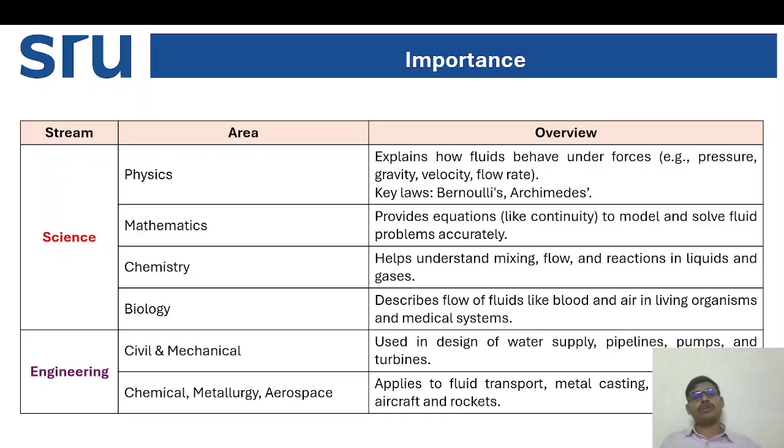Now understanding these things is very essential before going into the topic of civil engineering, particularly the civil engineering domain of fluid mechanics and hydraulics. So as I mentioned, first we have to understand the importance of why we are studying this subject, because we think this subject is only applicable for civil. No, it is applicable for mechanical, chemical, metallurgy, aerospace, physics, mathematics, chemistry and biology. In a broad view, I can tell you science and engineering. So that thing we have to understand in a precise way.

One, water distribution. To distribute water from one place to another, maybe the source is from a pond or lake or a reservoir, we should understand. Only then can we distribute fluids, and hydraulics, and coming to flood control. Let's see one after one how we are interlinked. Now coming to the three categories I have considered - it may be more, but to easily understand I have considered these things.

Now coming to air. Air is a fluid, obviously, so everyone will agree air is a fluid. As I mentioned, fluid is in vapor. Civil engineers design buildings, right? Agreed, civil engineers will design buildings, bridges and towers, so they are tall structures.

Now these structures face wind pressure. Obviously, if you are increasing to 10 floors, 20 floors, 30 floors building, wind pressure won't be similar when you are on the ground and when you are going into the higher floors. So knowing fluid mechanics helps them make sure the structure stays safe and stable in wind. Understanding fluid mechanics always makes the structure stable as well as safe in wind terms.

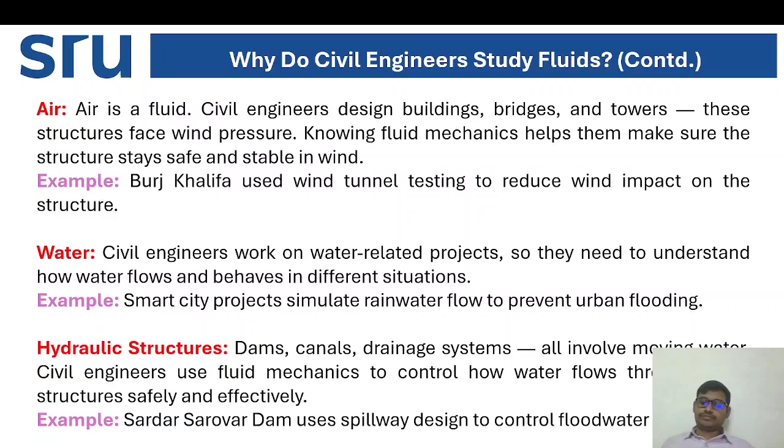Now we understood the importance, and we understood the forms like air, water, and hydraulic structures. Now the next one is the development of fluid mechanics. We need to understand how it got developed - first we have to know the past history, what happened in the past, what changes were made, what the present scenario is, and what we can do for the future. If you understand these things, tackling problems with respect to fluid mechanics becomes very easy. So first, I want to discuss fluid mechanics.

Fluid mechanics is a science that studies how liquids and gases behave, both when they are still at rest and when they are moving in motion. As I mentioned, liquid means water, solid means snow, and gaseous means vapor. So studying liquids and gases in terms of at rest - what do you mean by rest? What do you mean by motion?

At rest means, you can see a water tank which is able to supply an entire house. We place that water tank on the roof of the building, so it is constant, having some amount of water in a stationary way, but always filling and taking - we are filling the water tank and utilizing it for our needs. So when it is at rest, what are the consequences? We have to understand. And when it is moving, like from one reservoir to a certain city, if we are supplying water, what are the consequences - in the sense of making losses, less losses, and low cost. We have to focus on this.

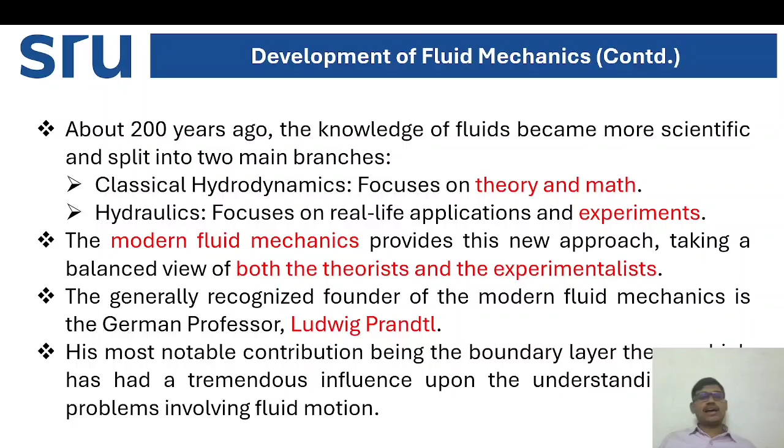Now I want to put this simply. I have summarized the development of fluid mechanics: first fluid, then Archimedes around 250 BC, then the Roman Empire, then Leonardo da Vinci, then 200 years ago they were classified into classical hydrodynamics and hydraulics, then the German professor Ludwig Prandtl.

Now coming to the development of fluid mechanics. You can see here: 250 BC, Archimedes' principle established. 1500s, Leonardo da Vinci's early fluid flow designs. 200 years ago, division into classical hydrodynamics and hydraulics. And in the modern era, Ludwig Prandtl's boundary layer theory.

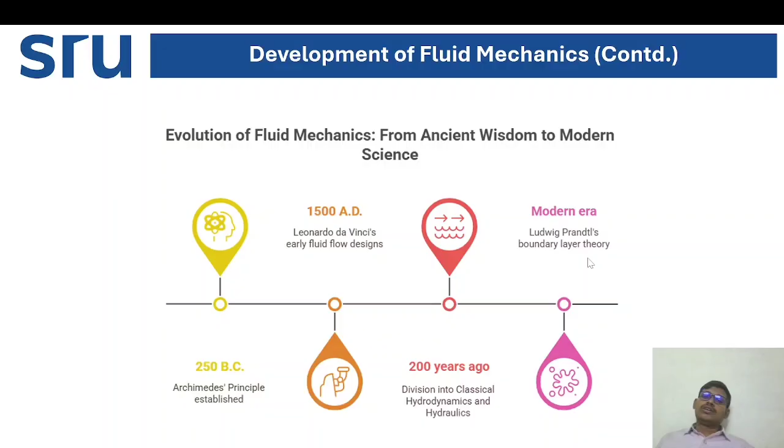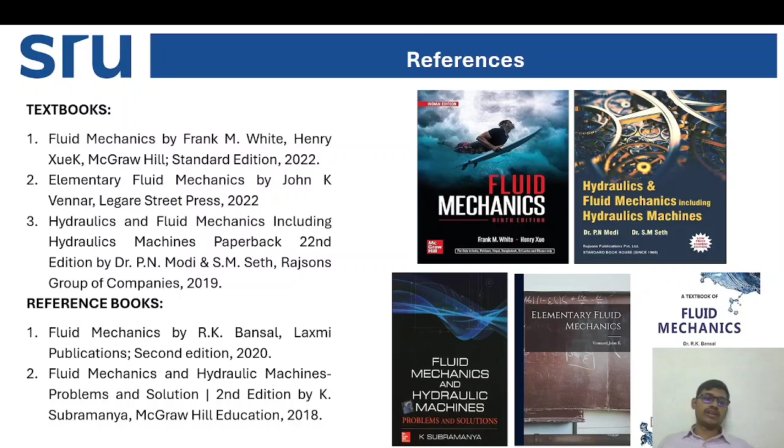I want to give some reference books which are not restricted, but they are the latest versions. If you need, you people can go through these. If not, you people can go with your own choice or one someone suggested. There won't be any kind of force - we just have to gain the knowledge.

Now coming to what is mechanics. We know fluid, right? So now what is mechanics? Mechanics is broadly classified into two ways: solid mechanics and fluid mechanics. Now we will see the definition of mechanics. Mechanics is a branch of physics that deals with the motion and forces on bodies - with respect to motion as well as with respect to forces on the bodies.

Slowly we will go one more step, that is called static and dynamic. Both solid mechanics and fluid mechanics have static and dynamic, and fluid mechanics is further divided into kinematics and dynamics. Solid mechanics is nothing but a branch of mechanics that deals with the behavior of solid materials under force.

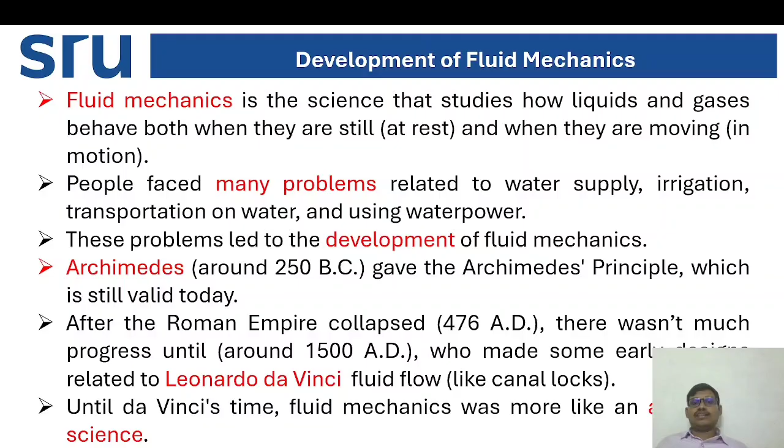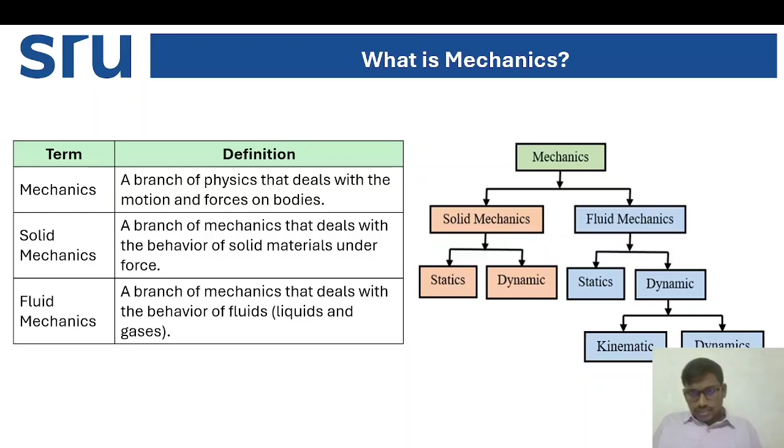You can see the previous definition: fluid mechanics is a science that studies how liquids and gases behave both when they are still at rest and when they are moving in motion - at rest and in motion. So this is the subclassification of mechanics. Mechanics means something is happening.

As I mentioned, solid mechanics and fluid mechanics - solid mechanics means solid material under pressure or force, and fluid mechanics means static and dynamic. Now we will see a small difference, then we will go completely with respect to solid.

So solid means it deforms only up to a point. Now fluid is nothing but molecules that are loosely packed and can move freely.

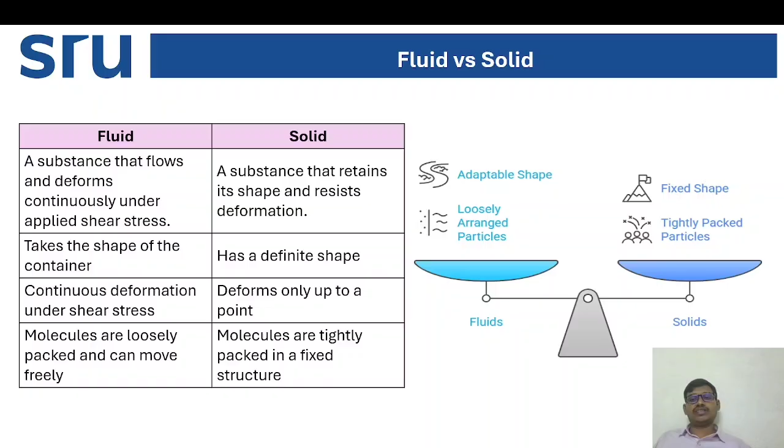Fluid is something that can flow from one reservoir to a city. If we want to supply some water we can supply, but with solid we cannot do that much because it resists. So now we are slowly going into fluid mechanics.

So the branch of fluid mechanics is, as I mentioned, statics and dynamics. Again, dynamics is divided into fluid kinematics and fluid dynamics.

Statics is the study of fluids at rest. Static means you are in a steady position. Example: water pressure at the bottom of a tank.

Dynamics is the study of fluids in motion. Example: water flowing through a pipe.

Now coming to fluid kinematics, the study of fluid motion without considering the forces causing motion. Water moving in a river is the best example.

Fluid dynamics is the study of fluid motion by considering the forces acting on the fluid. The best example is water jet hitting a wall.

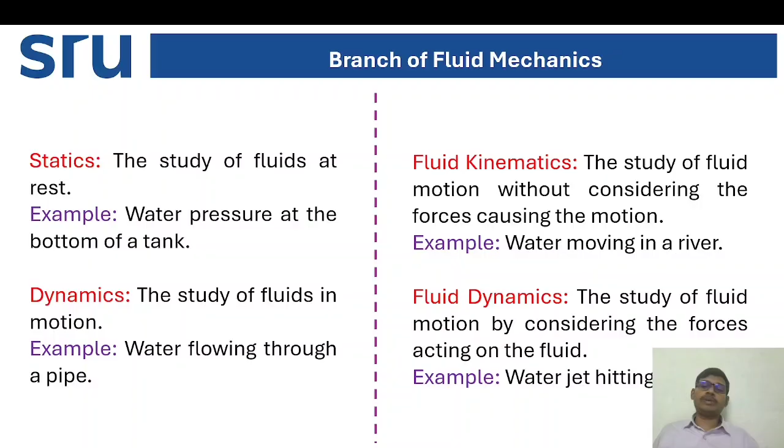If I tell you just theory, you people cannot understand, so I want to show some images so that you can understand easily in terms of static and dynamic. So here you can see a plastic water tank storing some water. This is static, showing how much load it is able to bear.

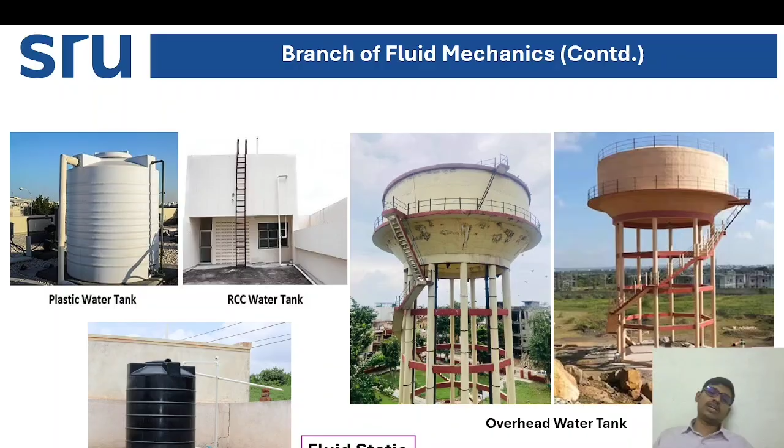And here we will construct an RCC water tank. This is another one, and we can see overhead water tanks. Both are overhead water tanks constructed to supply the community near that particular water tank area, which is essential. So these all come under fluid statics, and these images are taken from Google Images, not created by me. I am using these images to share the knowledge.

Now the other branch of fluid mechanics is dynamics. You see Indira Sagar Dam in India, storing water that can be used for multiple purposes. Here you can see it supplying water from a tap and shower, and this is fire — when a fire incident happens, it will sprinkle water. So these are all kinds of fluid dynamics.

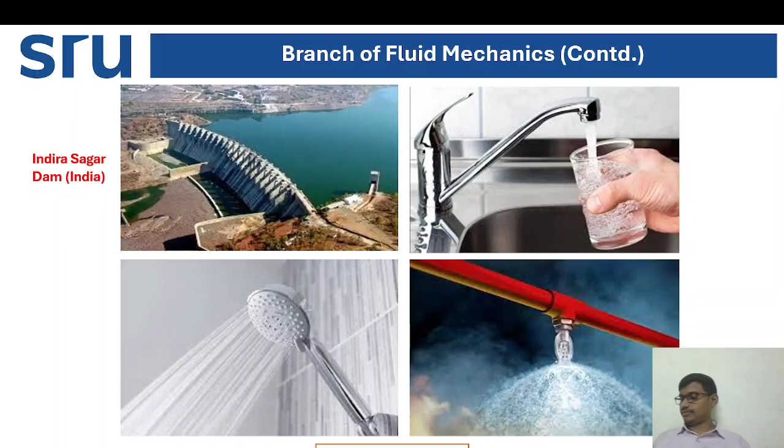Now coming to the basic thing called the definition of a fluid. I have started this subject with fluid mechanics and hydraulics, but I never told the definition of fluid, because you people need to understand the importance first, then the types like air, water, hydraulics, then the history of fluid mechanics, then what is mechanics. After mechanics, you need to understand static and dynamic with real time examples. Then only can you realize the definition of a fluid.

A fluid is a substance that can flow and take the shape of its container. As I mentioned, fluid versus solid: one is having a fixed shape, the other is not. A fluid has no fixed shape but can have a definite volume in the case of liquids, or expand to fill a container in the case of gases.

Liquids do not change their volume easily when pressure is applied. They are hard to compress, so their volume changing is not an easy thing. In contrast, gases can be compressed or expanded easily, meaning their volume changes significantly with changes in pressure and temperature.

Fluid is categorized as ideal or real. In simple words, ideal fluids have no viscosity or surface tension. Real fluids exist in nature and have viscosity and surface tension as well as compressibility. Now slowly we are entering some terminologies you may not have heard about: viscosity, surface tension, and compressibility.

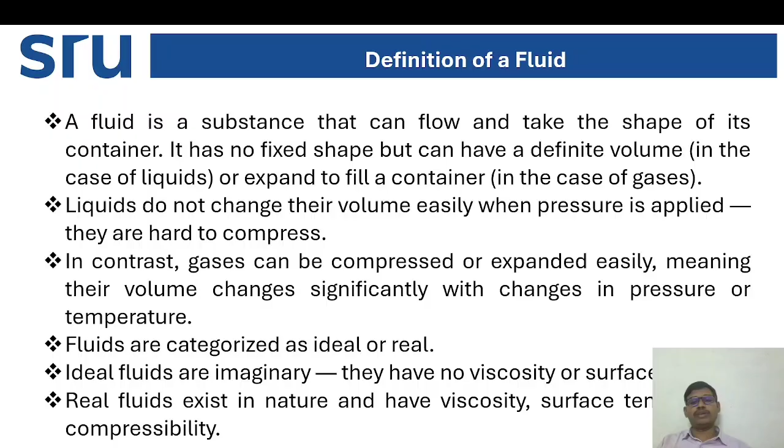Compression means just compressing, like a gas cylinder where the gas is compressed. But here the terminology is viscosity and surface tension - these we will explain in fluid properties in my upcoming lecture. So real fluids you can understand as the opposite of ideal fluids, where there won't be any viscosity, surface tension, or compressibility. But real fluids exist in nature - whatever is surviving around us is considered to have viscosity, surface tension, and compressibility.

Now, measurements in units of measurement. Units are standard ways to measure physical things like length, mass, time, force, area, and volume, depending on the metric system given.

The system of units used in mechanics is based upon Newton's second law of motion, which states that force equals mass times acceleration. That means if we want to find units, we need to understand which metric system - metric system or English system. Metric system has CGS and MKS, and English system has FPS.

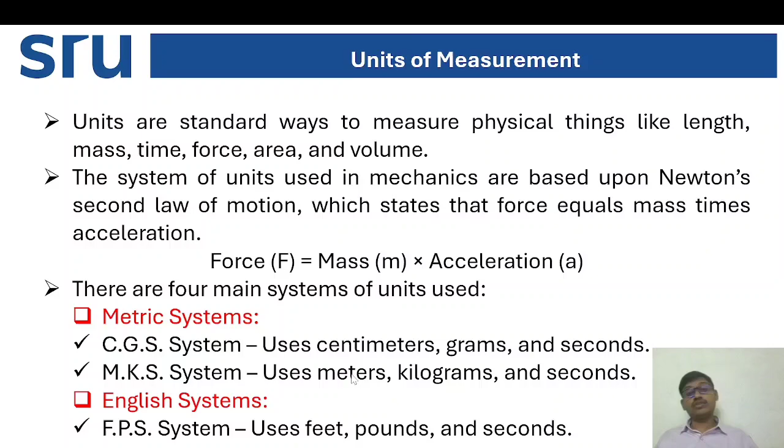Metric CGS means centimeter, gram and seconds - they measure only in centimeters and grams. MKS means they measure only in meters, kilogram and seconds. FPS is nothing but feet, pounds and seconds.

In the past, scientists and engineers around the world used different systems of units like the metric system or the English system initially. This often caused confusion and errors, especially in international communication and collaboration. For example, they will tell feet, we will tell meters, so there will always be confusion.

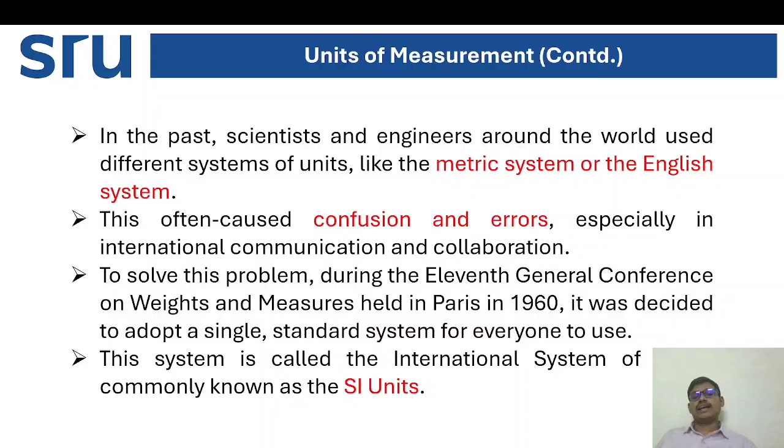To solve this problem, during the 11th General Conference on Weights and Measures held in Paris in 1960, it was decided to adopt a single standard system for everyone to use. This system is called the International System of Units, commonly known as SI units, and worldwide they are using this system.

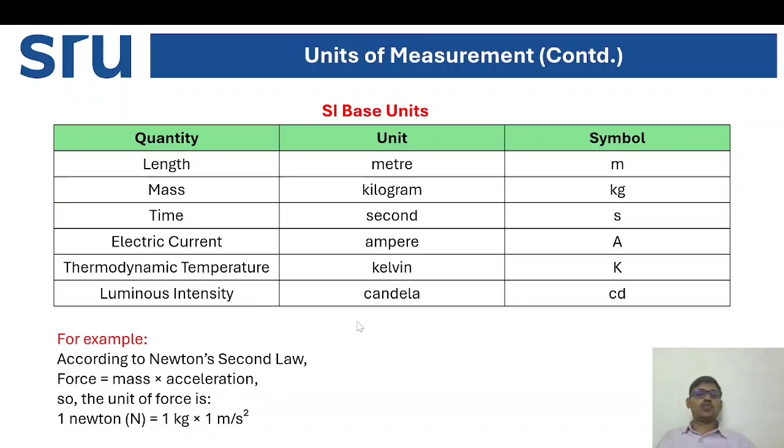For example, according to Newton's second law, force equals mass into acceleration, as mentioned before. So the unit of force is mass, which is kg, into acceleration, which is meter per second square - length by how much distance, within how much time. So 1 Newton equals 1 kg into 1 meter per second square, or kg meter per second square.

Now the next topic is the concept of continuum. The continuum concept assumes that fluids are continuously distributed without gaps. For example, if you want to transport liquid from one place to another, the water molecules will always stick together and travel - you have to assume this, allowing properties to be defined at every point in space and time.

So describing fluid flow quantitatively makes it necessary to assume that flow variables like pressure and velocity, and fluid properties, vary continuously from one point to another. Properties will vary from one point to the other point.

Next we will see the fluid properties. In the continuum approach, fluid properties such as density, viscosity, surface tension, temperature, and compressibility - we will discuss each in upcoming slides. Density, viscosity, thermal conductivity, temperature, etc. can be expressed as a continuous function of space and time. So that's the concept of continuum.